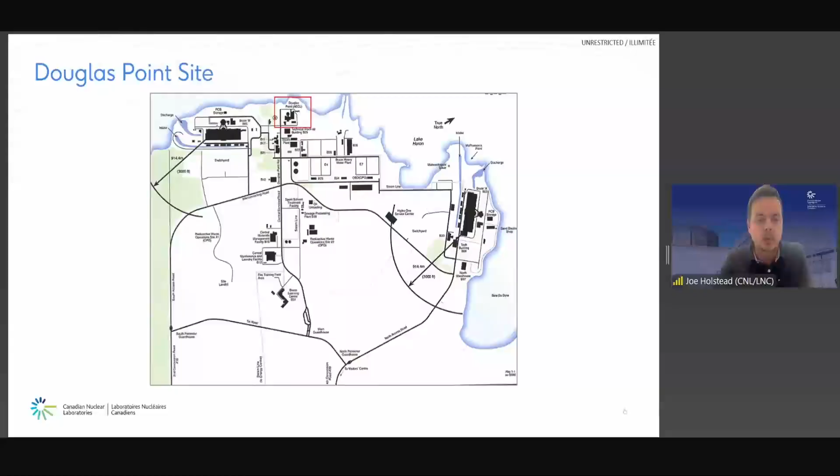All right, just to locate ourselves, Douglas Point sits within the Bruce Power site. You can see us, we're basically between the two units, but it is administered by CNL. We get security services and stuff like that through Bruce Power though.

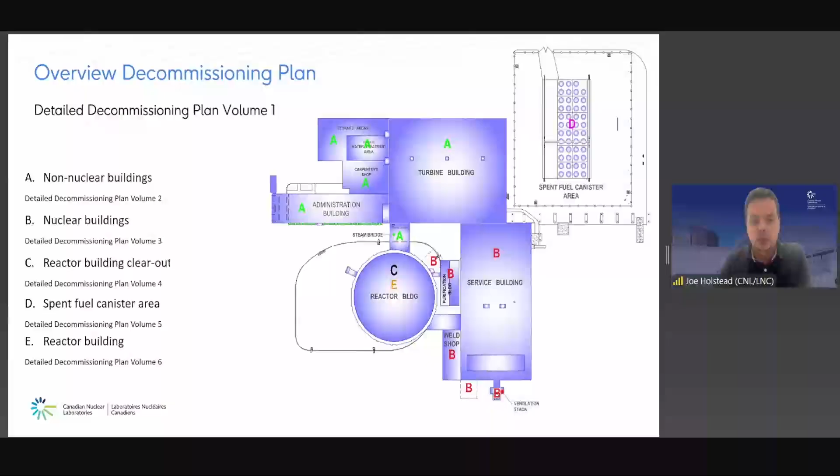Just to talk about the overview of how we are approaching decommissioning, for anybody who's unfamiliar: we basically have 6 volumes of what are called detailed decommissioning plans, which is how we lay out how we're decommissioning a building. Volume 1 is an overview of the approach. Volume 2, also called planning envelope A, as you can see all the buildings labeled A, and those are the non-nuclear buildings. Volume 3 is what we call the nuclear buildings, which is the service building and purification building primarily. Those are labeled B there, planning envelope B.

The next one, volume 4, is all the internals of the reactor building, with the exception of the calandria itself and the structure of the reactor building. That's planning envelope C. Just for reference, 1, 2, 3, and 4 are approved with the CNSC. Volume 5 is not being submitted or prepared yet, and that is the spent fuel canister area. Volume 6 is the reactor building shell and the actual reactor or the calandria.

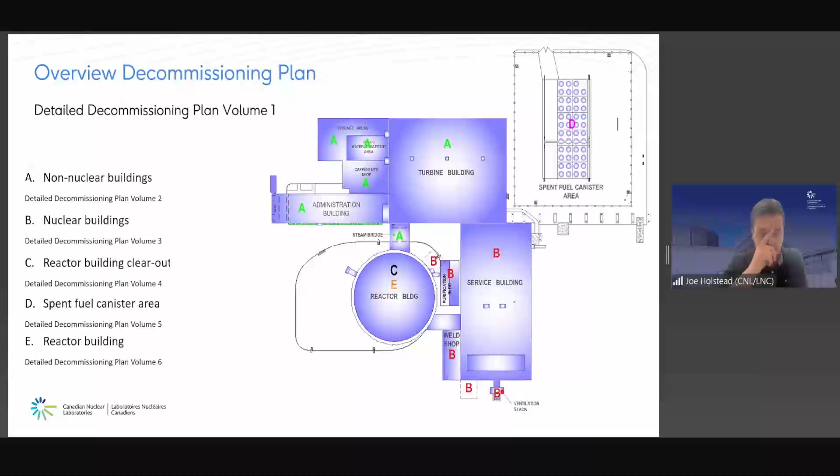Just to quickly touch on where the waste is going. Looking at the waste so far, we're at about 96% recycle or reuse, with a very small amount going to landfill, and hazardous waste. That's mostly ACM and some PCB waste there, and a very small amount of LLW that we weren't able to recycle, which is low level waste.

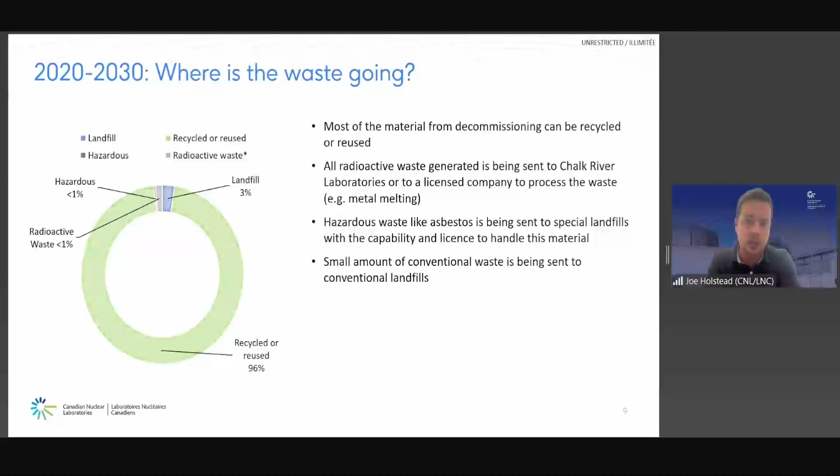All right, let's show some recent progress on the site. The non-nuclear building demolition is well underway. This photo you see here is from October or early November. The administration building and ancillary that you see on the left are totally gone, and the turbine building is about half finished.

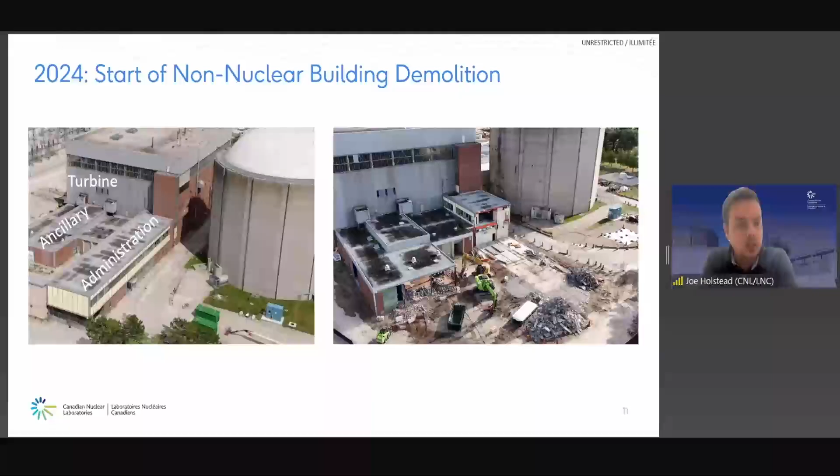This one was probably from a month ago, but you can see that the cladding is being removed. And if you noticed on the right picture, that really big orange gantry crane is also now being removed, which I believe is the biggest lift we've ever done at Douglas Point. So we were quite proud to get rid of that thing.

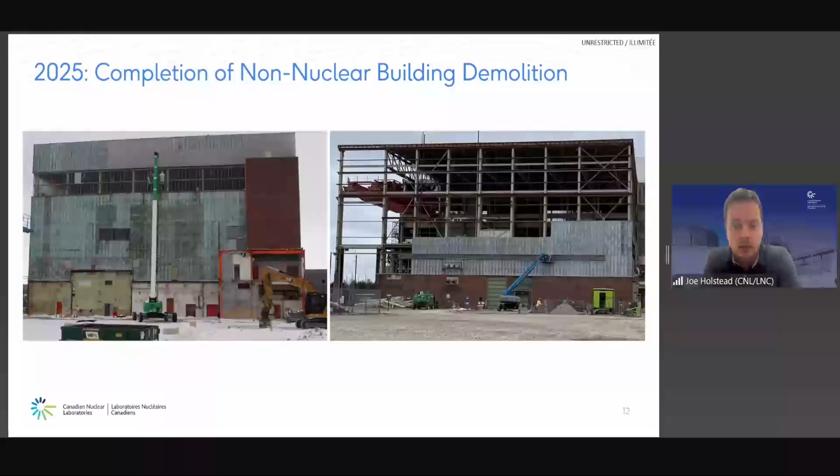As you can see there, those are good pictures of the gantry crane removal. To give you an idea, that beam they're lifting on the left is 120,000 pounds, so it's not a small thing by any means. All that metal is now being cut, processed, and shipped offsite for recycling.

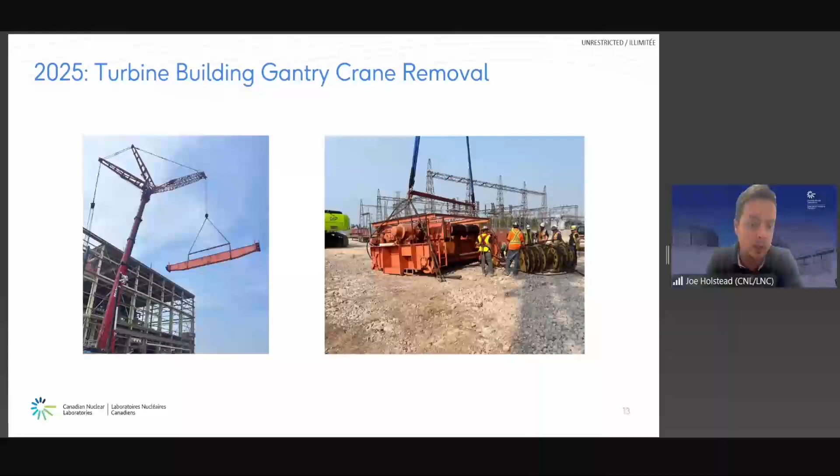Another really big milestone we hit this year is our spent resin storage tanks, which had been emptied in 2019, have now been physically removed from the site, lifted out of their underground vault, and shipped to a contracted partner we use, who are cleaning the tanks. Those tanks will actually be able to be free released for recycling.

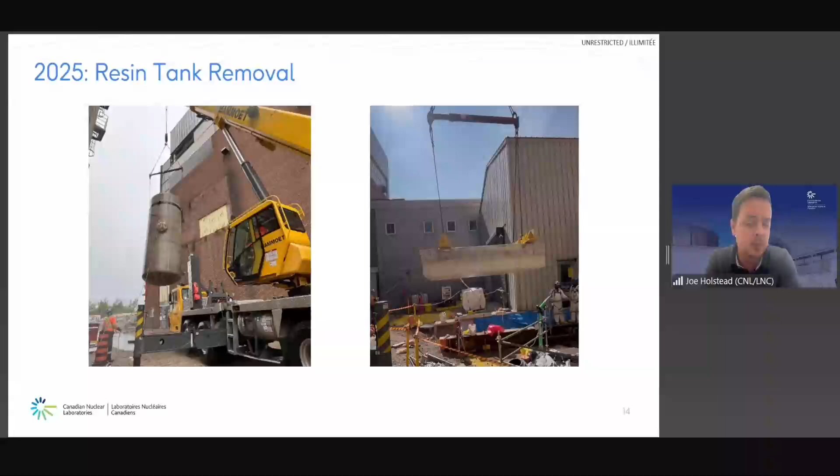Before we demolished the non-nuclear buildings, we dug a trench around the whole building to really ensure that it was isolated. That was quite successful in progressing, and we're now going to repeat that success for the rest of the nuclear buildings over the next year.

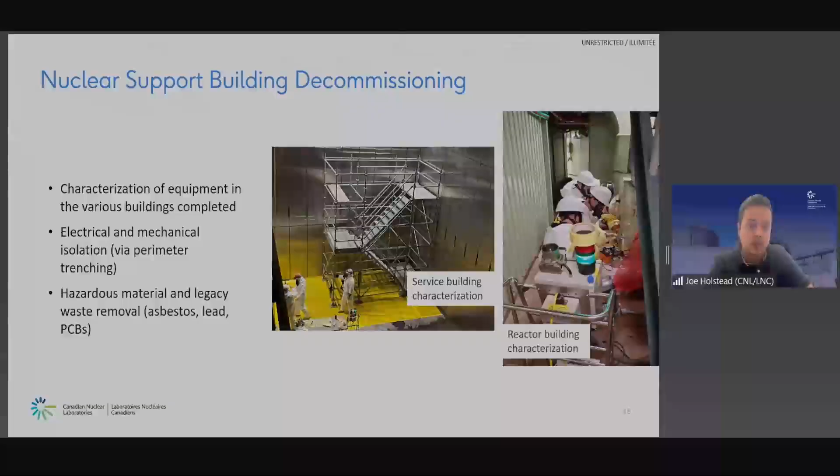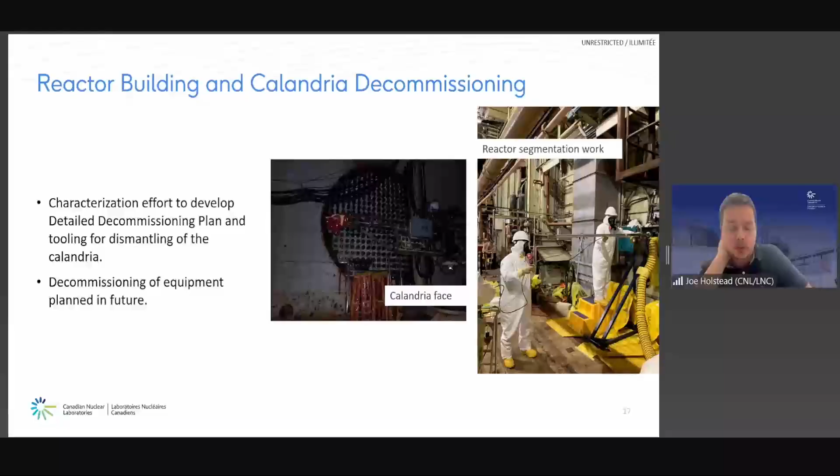So yeah, this is a shot of the calandria face. They've done almost all the characterization work. There's just a little bit of follow-up characterization work this year to be done on the reactor, and the rest of the systems in the reactor building have been characterized now. We're now in the planning for decommissioning and working with a contractor partner to decommission the rest of the systems.

On top of all the decommissioning, we perform storage with surveillance as part of our mission, and that maintenance includes some projects as well. There's a sump pump replacement winding down in a couple months, which updates our sump pump system to be automated and increase its functionality. We're also reconfiguring our fire alarm systems, and we have an ongoing mission to do fuel canister inspections, among other items. It's a very important part of our mission to keep up with storage with surveillance.

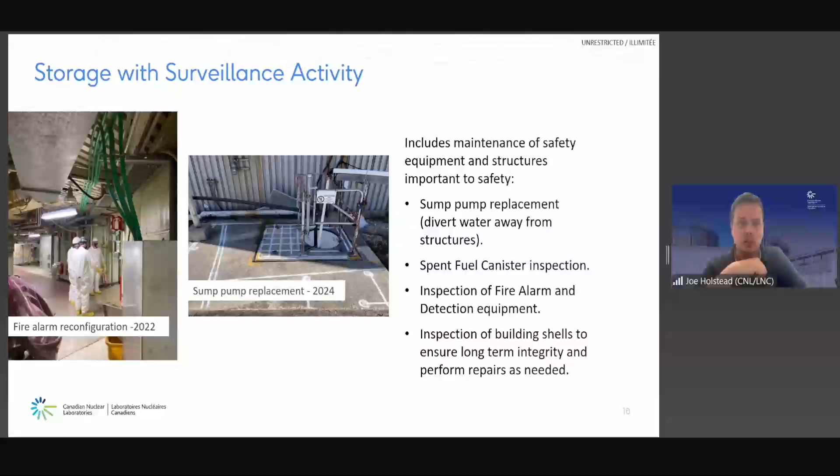Okay Margot, do you want to go over regulatory oversight? Yeah, back to me. So, next slide.

As Joe mentioned, we've got those 5 planning envelopes or work packages for the project, and right now we've got a 10-year license up to 2030 to complete the first 3. Joe also mentioned we needed approval from the CNSC on each of the detailed decommissioning plans for those work packages, and we have that approval for the first 3. Sometime before 2030, we'll need to apply for a licensing change that would enable us to complete the decommissioning of the spent fuel canister area and the reactor building itself.

We also report to the CNSC on an annual basis with our annual compliance and monitoring report, which covers our activities over 15 different safety and control areas. I wanted to touch on a few of the highlights from the 2024 annual compliance and monitoring report.

First, all licensed activities continue to be carried out safely and securely. A really big win was that we had no lost time injuries at the site. All releases were below the derived release limits, and we're talking very, very much below, less than 0.01%, so very small, very minimal.

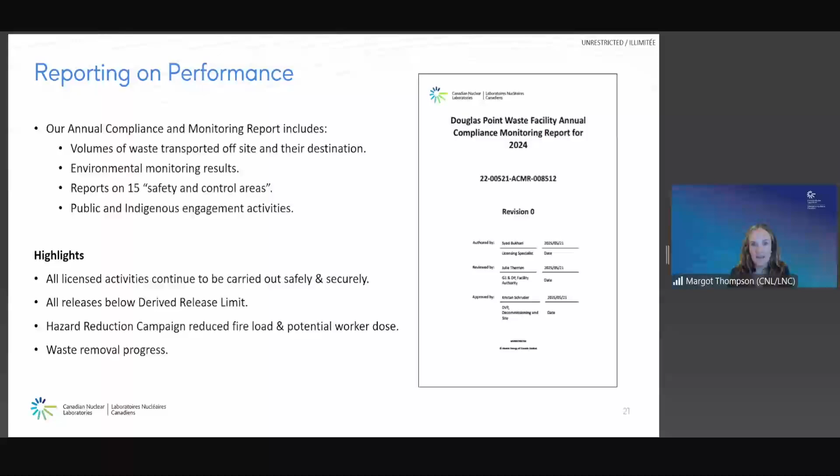We also had some progress on waste removal. We had 7 low-level waste shipments, 14 hazardous waste shipments, around 25 shipments of material for recycling and reuse, and around 25 shipments of conventional waste. Each of those waste streams goes to the appropriate facility: low-level waste goes to Chalk River for storage, and sometimes to the supply chain for waste minimization. The hazardous waste that's not radioactive goes to licensed facilities that can manage that kind of waste.

That's the end of our webinar, and we'll move into the Q&A portion, and I'll turn it back to Mike to facilitate that.